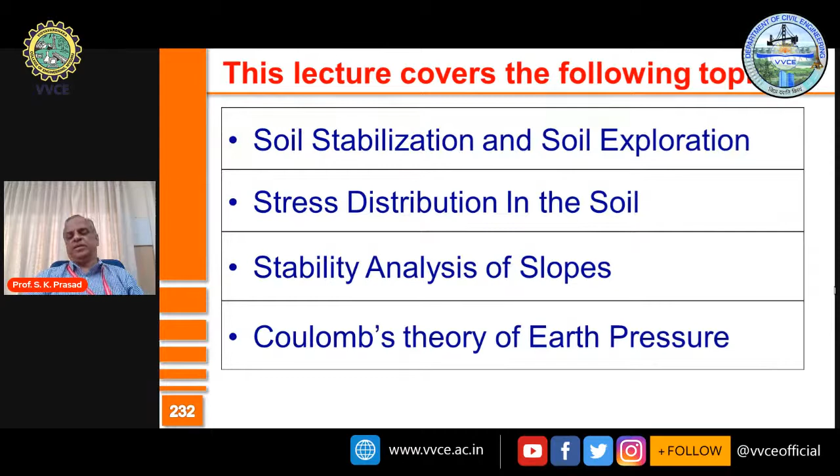Friends, you already know that geotechnical engineering is one of the popular branches of civil engineering in GATE. Also, from the point of view of overall development in civil engineering, I strongly believe good knowledge of geotechnical engineering can take you forward, because there are lots and lots of opportunities from the geotechnical application side.

So one very important topic in geotechnical engineering is subsurface investigation. We build our foundations below the ground, but we will not know what is there below the ground beforehand. We'll either have to go deep and see, or use some indirect methods to explore. Only when we know what is happening below, only when we know whether the foundation soil is capable of taking the load coming from the superstructure, will we be in a position to build our structures safely and durably.

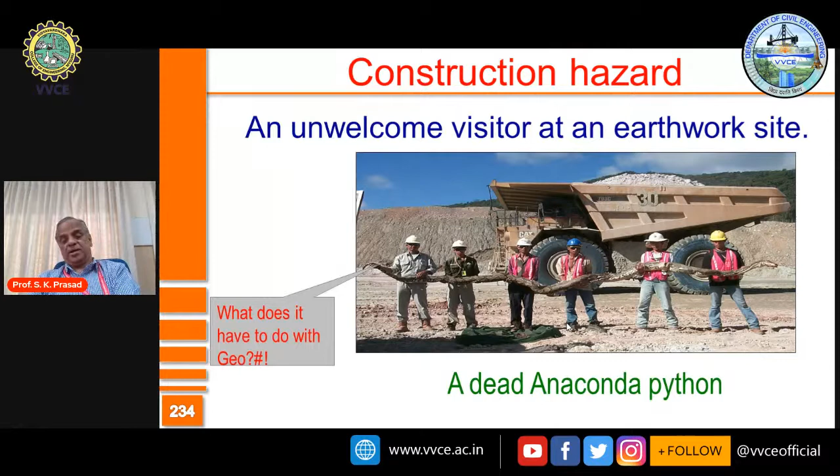Many times we use indirect methods to predict the strength and durability of soil, which is a big challenge. So we need to explore how good the soil is at different depths, which is the most suitable depth at which you have to found your foundation, and how the foundation and hence the entire structure is going to perform because of the load transferred from it to the ground below. This is a very important topic of foundation engineering.

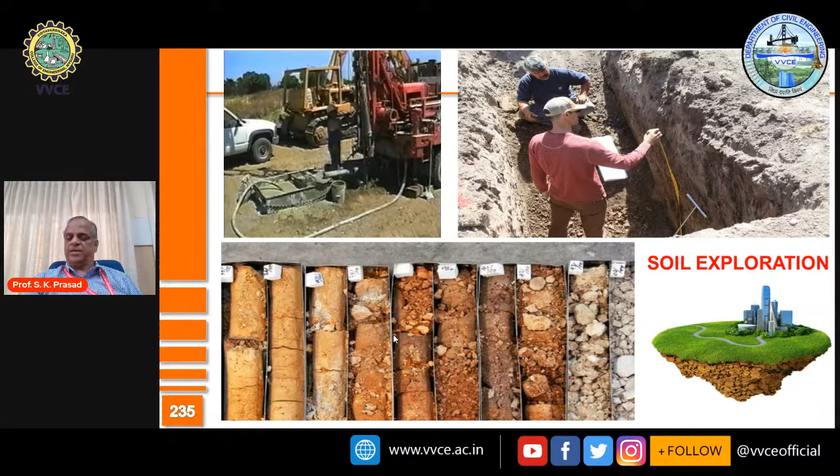Whenever you want to build any structure on the ground, it is the soil below which takes the load. So whenever boreholes are made, bore samples are taken something like this. Every sample can be different from the other. You need to identify the different properties of these samples, and hence predict how the behavior of the ground will be.

So you normally will have a soil report, which is a very valuable document for the design and construction of any structure. In a soil report, you may use data like SPT N value or shear wave velocity, or maybe sometimes plate load test can also be conducted.

You also collect data like water content, density, and at what depth the groundwater table exists. You try to find out the kind of soil available, and you try to evaluate strength parameters and settlement properties of the soil.

Use them to interpret. Basically, you have to identify the soil. I'm sure my colleague Professor Chetan would have talked about soil classification.

The biggest challenge is to decide the depth of foundation. Only when you decide the depth of foundation, you may be able to tell what kind of foundation to provide. These two are complementary to each other. So to determine the type of foundation, you require depth of foundation, and to also determine depth of foundation, you need to have a fair idea about the kind of foundation coming in.

So then you may also have to say whether the soil can be used as it is or does it require some treatment. You need to evaluate properties like safe bearing capacity of soil, and hence you can suggest the most suitable foundation you can go in for.

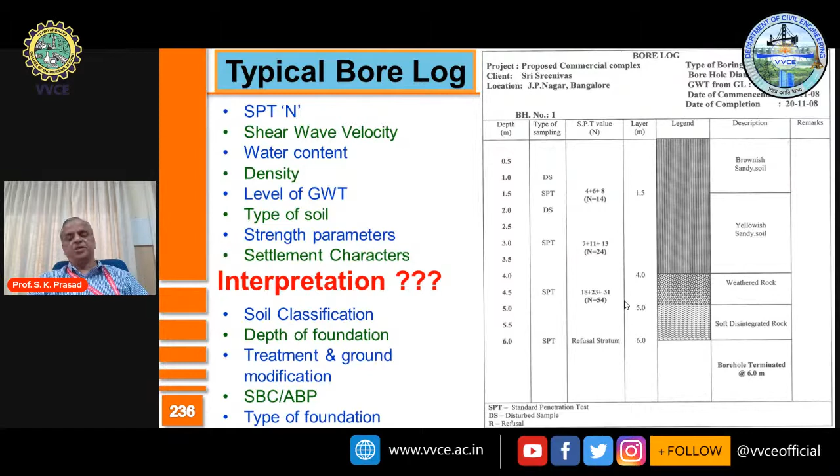I always advocate that soil investigation is very essential before any project you undertake. Earlier days, it was not considered mandatory. Many times people just assumed some data and managed to build the structures. Today, we don't have every place which has got good type of soil, and also we are having more complicated structures. Earlier days, if any soil was found to be unsuitable, there was scope to discard that site itself. We can't do that now.

So it is always essential that we do site investigation, get the data about the soil, and then do the construction. Just like you go to a doctor and ask for treatment - earlier days, the doctor used to identify or approximate certain things and just advocate some medication. Today we have very complicated diseases. Doctors cannot take risk. They would say go for tests, pathological tests, screening tests, and based on the test result, the doctor would confirm the kind of problem one has and provide the medication.

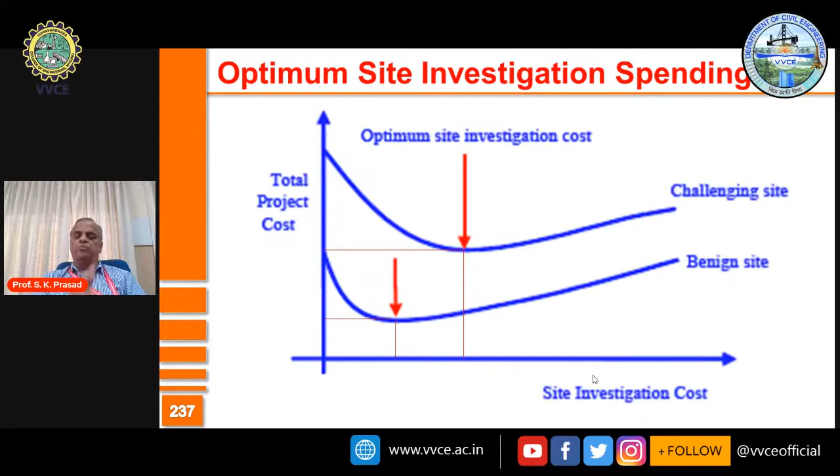So the message is site investigation is essential, whether it is an easy site or a challenging site. Cost for site investigation will automatically be more in a site where you have a lot of challenges. Otherwise, in an easy site, perhaps you may spend some nominal amount, but definitely note that the total cost of construction is going to reduce if you decide on doing the site investigation in the rightful way.

You might always have a question as to at what depth the investigation is essential. Let us say you have a foundation at a depth D, say 1 meter. You are going to found your foundation at 1 meter depth below the ground. The soil at this depth is going to take that load. So is it enough if you take the soil properties at this depth? That is one of the questions anybody would normally have.

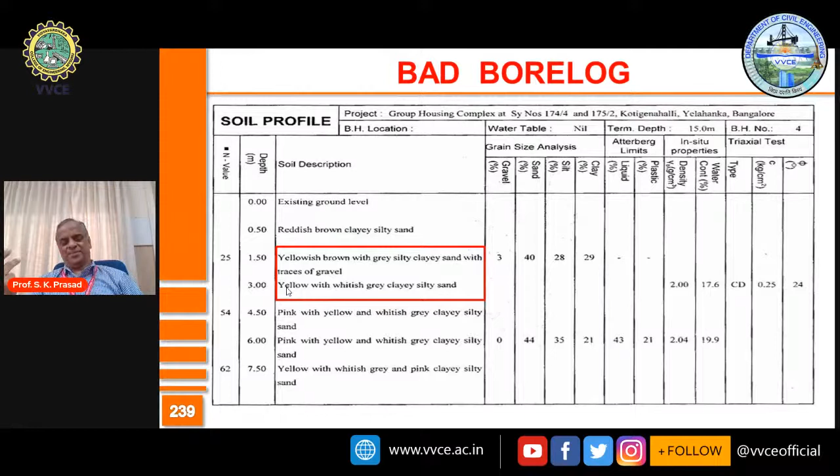But all of us know that according to IS classification, we define the soil by only 2 letters. So it could be gravel, it could be sand. But the way it is explained, it looks absurd.

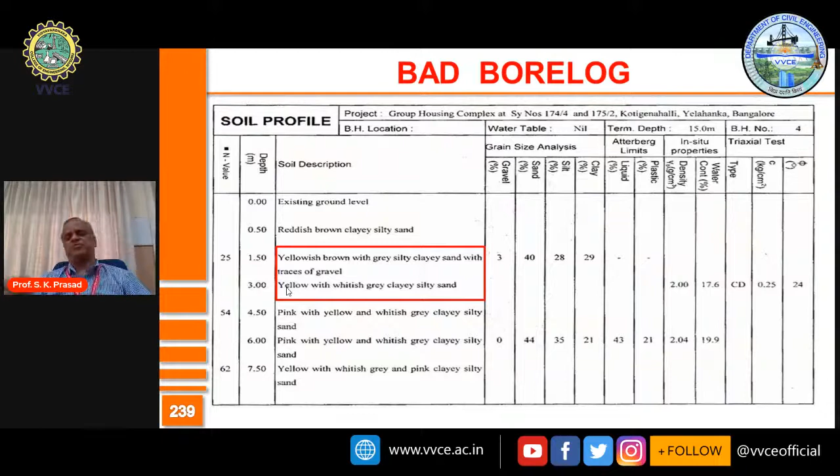So that just gave you one hint about what is a bad soil report. Whenever a soil report is given, it should be such that a person can really visualize what kind of soil exists there. And when he goes there, he should be able to identify that whatever is given in the report matches with whatever is seen in the field. And that is missing in many of the situations.

So one of the important things from soil investigation is that you either have a borehole or you make an open excavation, and then you take out the soil sample and take them to the laboratory and do the test. So one of the biggest challenges is to collect the soil sample in a possibly relatively undisturbed manner, because you need to predict whatever are the properties of the soil in the field.

And if it is already disturbed, if its structure is going to be disturbed, it's going to make things very different, because what you want is actually what is there in the field. So to collect undisturbed sample is a big challenge. For that, we use sampling tubes, and there are certain requisite properties of soil sampling tubes which are essential.

And to understand that, we have a few terminologies which I want all of you to be familiar with. It could be area ratio, it could be inside clearance, it could be outside clearance.

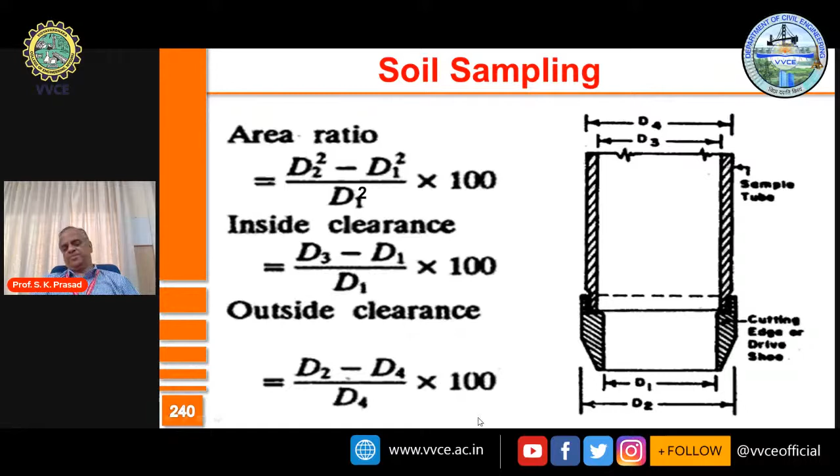And if at all you want the sampler to be the best sampler, there are certain provisions, certain guidelines for this. It is mentioned that the area ratio should be as small as possible. Under normal circumstance, it should be much less than 25%. But in soft, sensitive soils, and if the work is done for an important work, it should be less than 10%. Inside clearance should be 1 to 3%.

Outside clearance should not be more than inside clearance. Walls of the sampler should be smooth and they should be oiled before use so that friction can be reduced, friction can be minimized. Non-return valve permits easy and quick escape of water and air while driving the sampler.

So D1, D2, D3 and D4 are already explained. So these are some of the minimum requirements. Only when these requirements are satisfied, you say that the sampler is good. You say that the sampler causes minimum disturbance to the structure of soil.

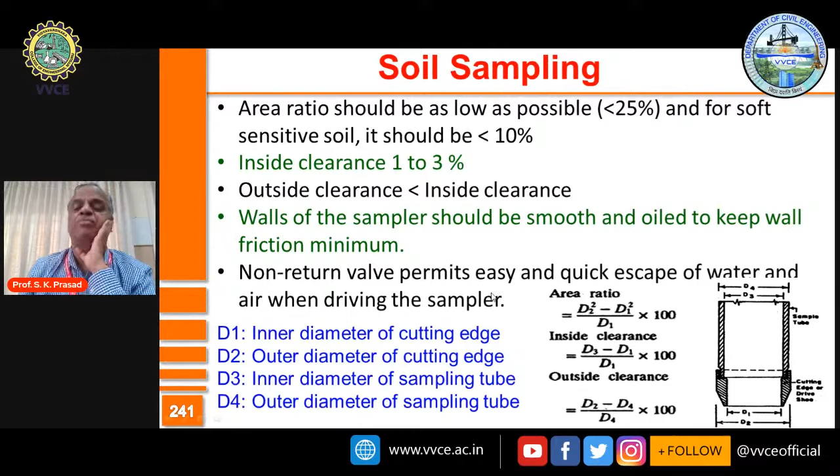So you might have questions. I would like you people to be familiar with the equations. Maybe if you learn them by heart also it is good.

The degree of disturbance of sample collected by the sampler is expressed in terms of area ratio. If the outer diameter and inner diameter of the sampler are DO and DI respectively, area ratio is given by, we already dealt with, DO squared minus DI squared divided by DI squared into 100.

So I have taken a typical case when the outer is 44 millimeter, the inner is 38 millimeter, and area ratio happens to be 34.1%, which is much higher than what is acceptable.

So if you have something like this, it is not a good sampler. Maybe if you reduce DO to 42 millimeter or even 40 millimeter, then the area ratio is likely to come to less than 25%, therefore acceptable.

Therefore, you should be very clear, and hence, the walls of the sampler should be as thin as possible, as smooth as possible. Then only you may be able to achieve better results. Otherwise, they may cause disturbance to the sample which is collected, and hence, samples may not represent the actual site condition.

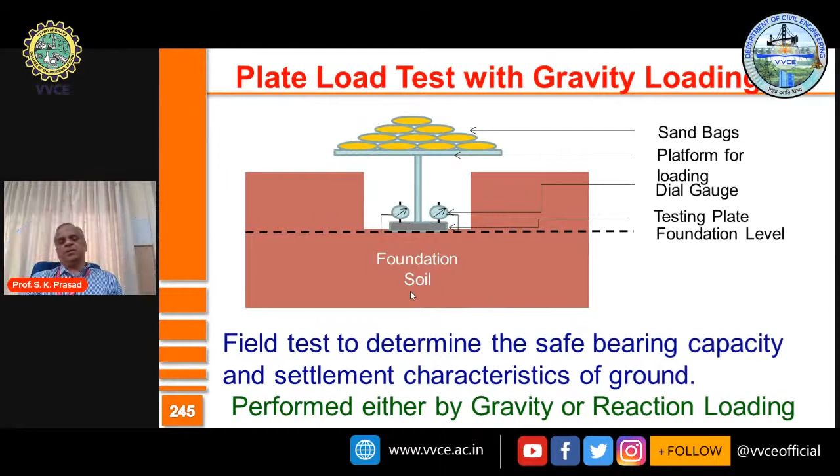Then plot a graph between applied load and the deformation or settlement. The kind of loading many times preferred is reaction loading. So in this case, instead of putting the load through sandbags, we are going to use a truss or a reaction beam, and of course a jack - just like you use a jack to lift up the wheels of a car when it is punctured.

So in the same way you use a jack here, keep on loading through reaction loading and see the deformations measured from dial gauges. This is preferred over the gravity loading case because there you require a huge number of cement bags or sandbags - could be 100, 150, 200, it all depends on how much load it takes. And then you require a solid platform to house all these sandbags.

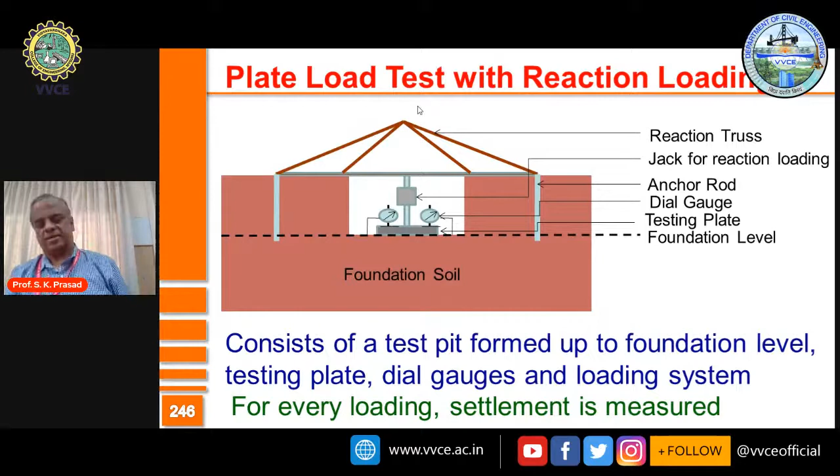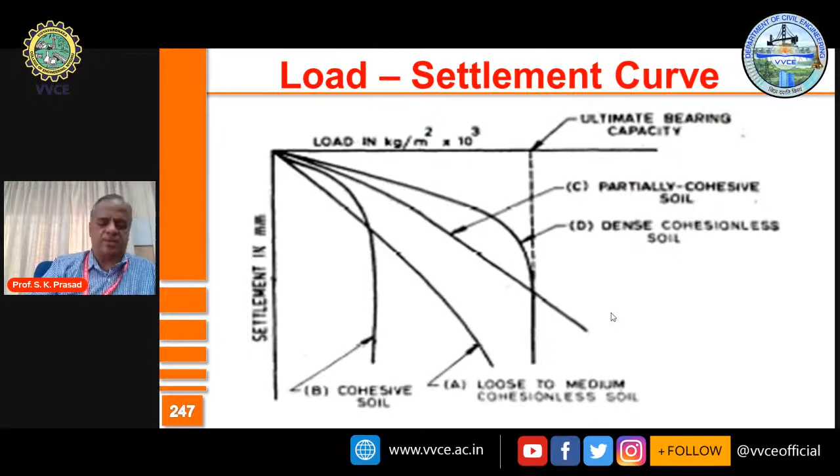So you will be in a position to determine allowable bearing pressure in a better way here, because you get the shear failure capacity at the time of shear failure, and you also get an idea about the settlement characteristics. So both these factors are to be considered from the point of view of determining the allowable bearing pressure.

Two, being a field test, there is no requirement of extracting soil sample. I told you, you need to extract soil sample, bring it to the laboratory and do the test. In this case, not required, because it is a test conducted in the field. Therefore, no need to collect sample - you conduct the test directly.

Test is similar to the field condition, most importantly. So in the field, how you load the foundation, exactly in the same way, you actually load the plate, and hence it simulates field condition to the best extent.

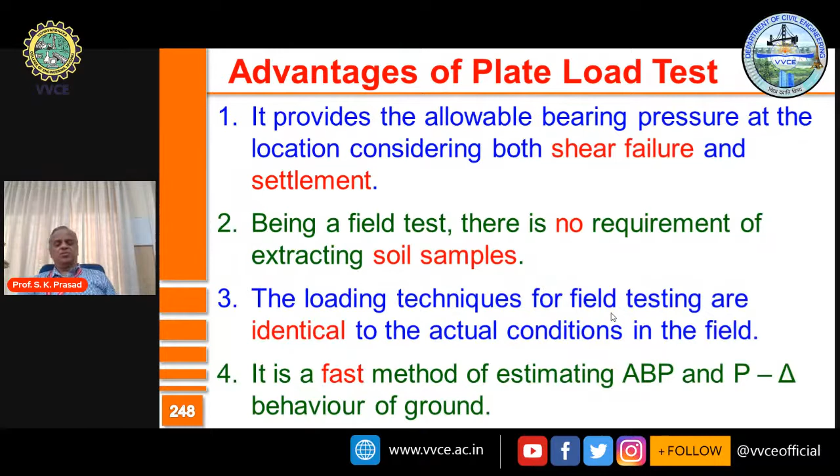It's a fast method. You do the test and quickly get the result, so it's a fast method to estimate the SBC or allowable bearing pressure of soil.

Some of the disadvantages: test results reflect the behavior of soil below the plate, not the actual footing. This is what you need to very seriously know. Let me try to show here.

Let us say you do the test on a plate of size 30 centimeters, 0.3 meter. The area of influence will be 2 times 0.3, about 0.6 meters. So the area of influence is approximately 0.6 meters. Any soil below, you don't know what type of soil it is - it may be strong or it may be on the other side.

Let us say you have an actual footing of size 2 meters. Then its influence is for a depth equal to 2 times 2 meters, about 4 meters. So the test is conducted only at shallow depth - the area considered is only about 0.6 meters. Below that, even if the soil is poor, you will not be able to understand or assess it. So that's one of the major disadvantages.

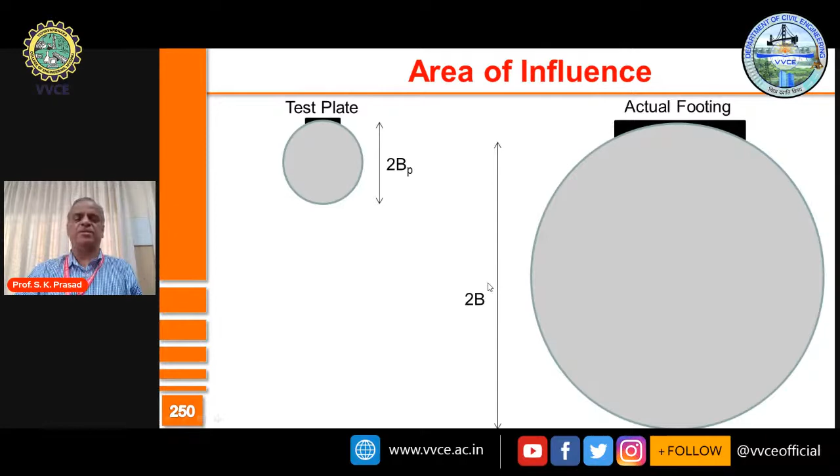It is essentially a short duration test. You do the test for a week or so, but our buildings have to last long, for centuries maybe. So long-term effects are not determined from this test. One of the long-term effects is settlement. Settlement can happen over a month, years, centuries - we don't know, and we will not be able to identify anything about the actual settlement, consolidation settlement.

Size effect is very much pronounced in granular soils which are cohesionless. So correction for size has to be given because the size of the plate is very different from the actual size of the foundation. It's a cumbersome procedure to carry equipment, apply huge load, and carry out testing for several days

in tough field environment, field conditions. So the test procedure is quite laborious. You require heavy trucks to carry the equipment. You need to do the excavation to the desired depth, and carry out several tests under tough conditions, which is fairly laborious. You require a lot of labor force and sophisticated equipment to transport in heavy trucks and so on.

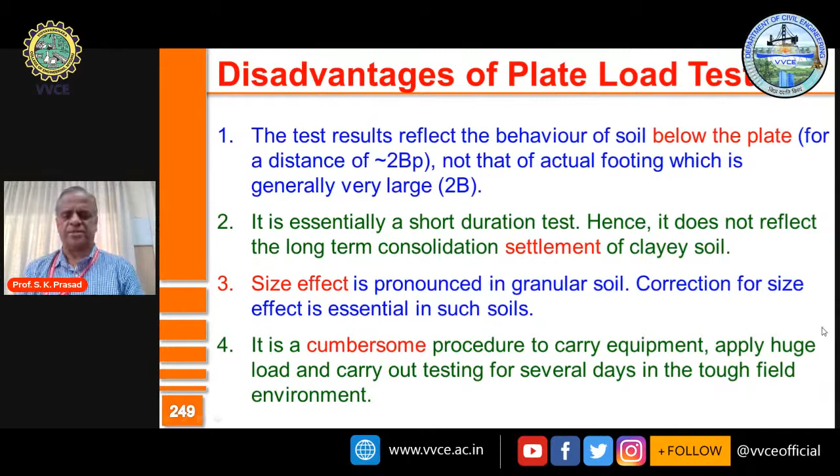The equation for clayey soil, cohesive soil, is very simple: SP by SF, settlement in plate by settlement in footing, is equal to BP by BF, width of the plate by width of the footing. You will know the width of the plate, you will have decided what should be the width of the footing, and you'll know from the plate load test what is the settlement arrived at under a given plate size. Therefore SF can be determined, so you can determine the settlement based on these characteristics.

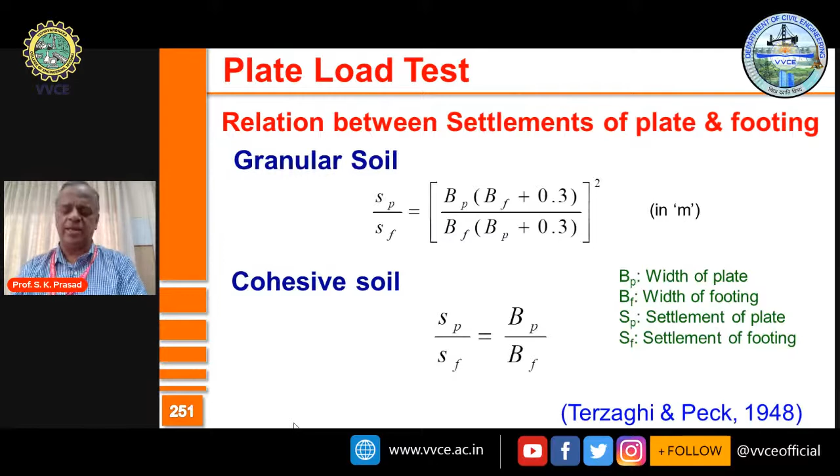In the same way, you can find out settlement in cohesionless soils also, granular soils also - the equation is slightly more involved, so you use a constant 0.3 when BP and BF are in meters. This is how the plate load test results are used to determine settlement. Therefore you have to identify what kind of soil it is - granular or clay soil - and then do your calculation using the appropriate formula.

Let us take a few questions here. The plate load test was conducted on clayey strata using a plate of size 0.3 meter by 0.3 meter, and ultimate load per unit area was found to be 180 kilopascal, 180 kilonewton per meter square. Ultimate bearing capacity of a 2-meter wide square footing would be

dash. Please note that you are using a plate for the test, size 0.3 meter by 0.3 meter, and the actual footing will be squarish again, 2 meter by 2 meter. From the plate load test, it was found that the ultimate bearing capacity is 180 kilopascal. What is the ultimate bearing capacity for the 2 meter by 2 meter footing?

I want you to read the problem, read the question carefully. It is mentioned that the type of strata available, the type of ground available, is clay soil. If it is clay soil, it has cohesion, and possibly the friction angle will be less or even can be discarded. So if you take the bearing capacity equation for square footing, which we dealt with in the initial days,

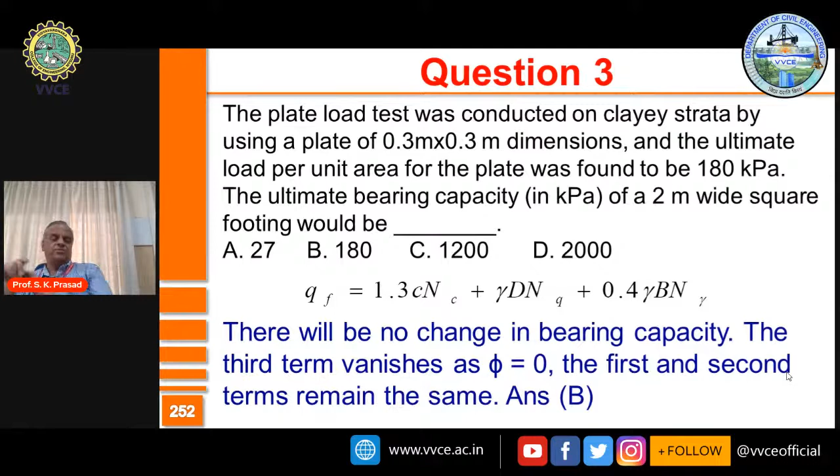Whatever is the NQ term, it will remain because the test is conducted at the same depth at which the foundation is put. Once the n-gamma term is gone, whatever is the width of foundation, bearing capacity is not affected. Only for the n-gamma term does bearing capacity increase with increase in width of the foundation. Therefore, since it is clay soil, phi is 0, there is no change in bearing capacity possible, and hence the answer is B, that is 180 kilonewton per meter squared or kilopascal.

Take this problem. A plate load test was conducted on clayey strata using a plate of size 0.3 meter by 0.3 meter, and the plate experienced a settlement of 2 millimeters. The settlement of a 2 meter wide square footing would be how much? First of all, find out the type of soil.

It is clay soil, therefore you use this equation. If it is granular soil, you have to use a slightly different equation. The plate size is 0.3 meter, the settlement is 2 millimeter, but the actual footing size is 2 meters. Therefore, you find that the settlement is 13.33 millimeters, or SF is equal to 13.33 millimeters.

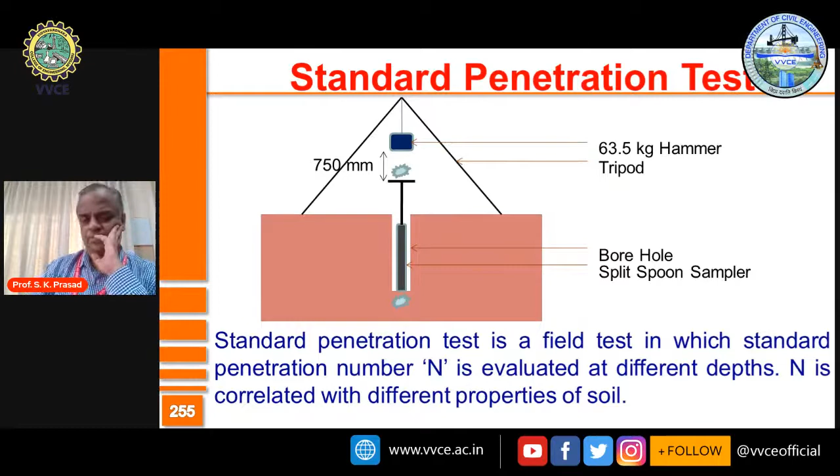So the test is: clean the borehole, approximately 100 mm in diameter, and then a thick walled split spoon sampler is driven into the hole using a standard hammer of 63.5 kgs, dropped from a height of 750 millimeters. The number of blows required for penetration of the sampler into the ground for three lengths, each of 150 mm, is identified and recorded. The standard penetration number is the number of blows for penetration of 300 mm beyond the seating drive of the first one, that is considered as the standard penetration number.

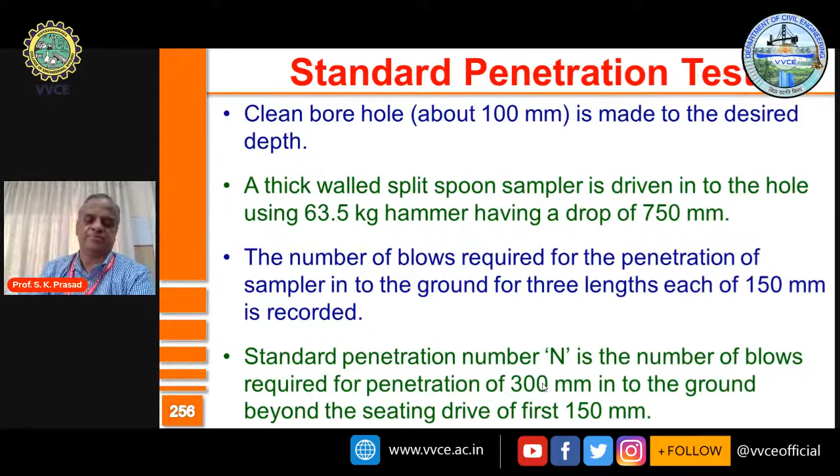If the number is more, it indicates that resistance is more, soil is stiffer. If the number is less, automatically the soil is on the softer side. These are some of the relations for various properties of soil as a function of SPT N value. N is a mere number, so you use N to determine density of soil and other characteristics, including allowable bearing pressure of soil. Here is one relationship, given by Teng way back in the 1970s or so, in the form of an equation like this, which can be used to determine the allowable bearing pressure.

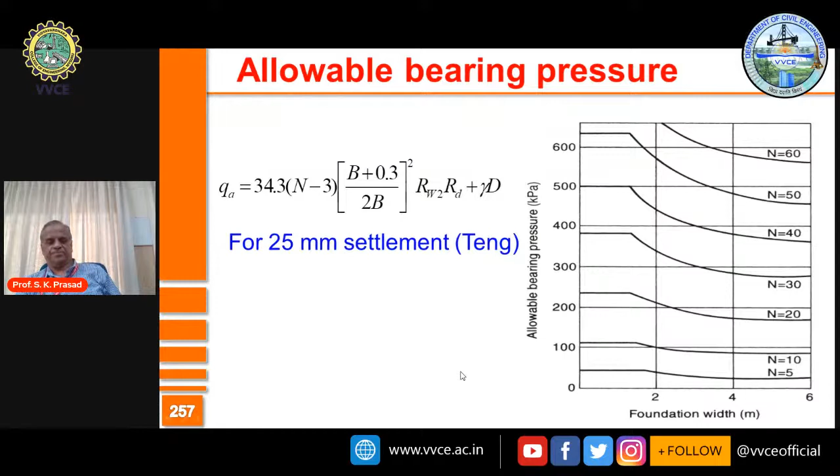You can also bring out the relationship between SPTN value and relative density, as given by Gibbs and Holtz or Terzaghi and Peck. When SPTN value is very low, the soil is very loose. When SPTN value is more than 50, there is good scope for the soil to be stiffer.

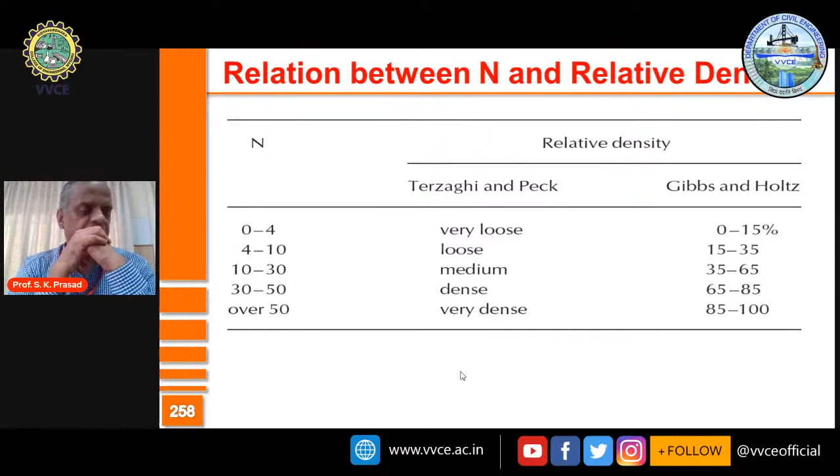You apply two major corrections to SPTN value. One is correction for overburden pressure, and the other is correction for dilatancy. You also apply correction for energy, but that is not covered in this particular topic. You can always refer to any other standard method where correction for energy is also given.

So now, correction for overburden pressure. Please note that SPT has to be conducted at the ground surface and at different depths below the ground till you reach the bottom where you may put your foundation or whatever it is.

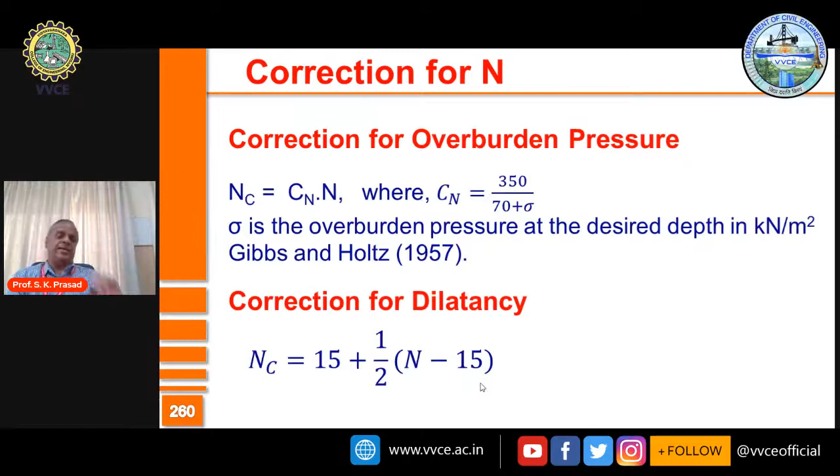The other test correction is for dilatancy. This correction is applied because the SPT test is done by dropping a hammer. That dropping hammer causes impact, and sometimes this impact may be good enough to cause liquefaction in the ground. Usually, loose ground having low density is likely to be affected by liquefaction, and hence the measured strength will be lower than the actual value. On the other hand, in stiff materials, measured strength can be higher than the actual value. So you need to consider this and apply your correction.

So very quickly, we will try to see some of the advantages and disadvantages of SPT, standard penetration test.

We like SPT because it is a simple test. It can be conducted by varieties of people. You don't require serious equipment. You require a hammer, and you require it to be dropped from a height. More or less, all other things are not so mandatory; you need a tripod to hold the hammer and so on. The test involves finding N, and this N is a function of many properties of soil: could be shear strength, density, allowable bearing pressure, relative density, dynamic soil properties, many, many things. So only one N is sufficient to determine several properties of soil.

That's the advantage. Samples collected in split spoon sampler can be used for laboratory testing. You can use the samples to directly do the testing in the laboratory and compare with SPT N value. It's a very quick test.

So what you have to do is have a borehole and conduct the test. It might take just a couple of hours. N, the SPT N value, can be determined along the depth in a borehole. At regular intervals you can determine it, and you'll be in a position to choose the right kind of borehole data, choose the exact.

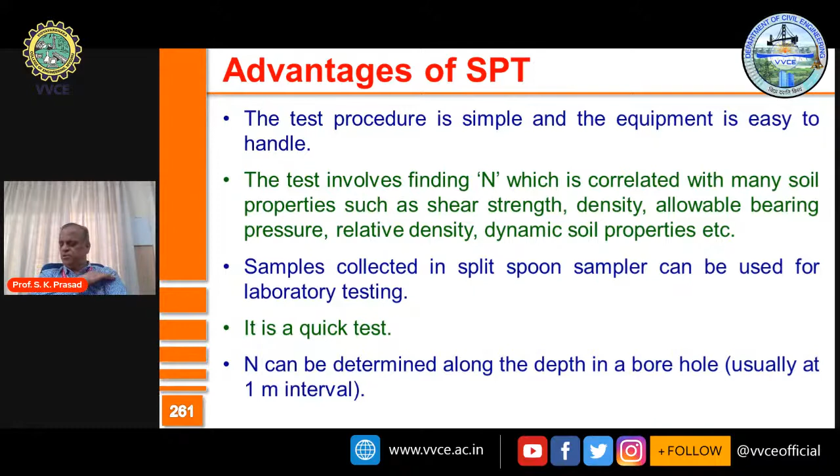So you can conduct N at different intervals of distance, maybe 1 meter or so. You'll be in a position to find actual soil properties at every 1 meter depth, or sometimes even 0.5 to 0.75 meter depth. Therefore, you'll be able to identify the exact depth at which the foundation can be founded.

Some disadvantages: the test is dynamic because you apply the load dynamically, but you use it for static properties of soil. What guarantee is there that dynamic and static properties correlate? You don't get continuous results, usually at 1 meter intervals. In very accurate cases, especially in places like Japan, 0.75 meter, but it's not continuous recording.

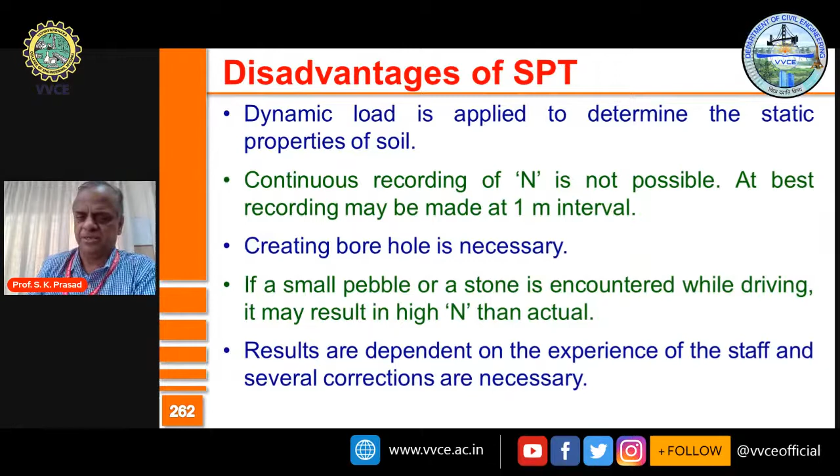Creating a borehole is a must, you need to create a borehole. And while driving the hammer, if a small pebble is encountered, the results are automatically boosted up, appearing as if it's very stiff soil. Results also depend on the experience of the staff members and several other details. So these are some of the main disadvantages of SPT.

Well friends, we'll try to see a few questions. If in saturated fine silty sand, measured value of N is 3, will the corrected N be more or less?

Since we say saturated fine silty sand with no mention of overburden pressure, the kind of correction is for dilatancy, and this is the formula you have to use. If the measured value is 3, you apply it here, the actual value will be much, much higher. Put N equal to 3, and you'll notice NC will be 9. So the value of corrected N will be more than 3.

On the other hand, take this case: you have a stiffer soil, measured N is 33. What about the actual N? Actual N will be less than the measured N, so the answer should be less than 33. Measured N is actually more than the actual value; the actual value should be 24.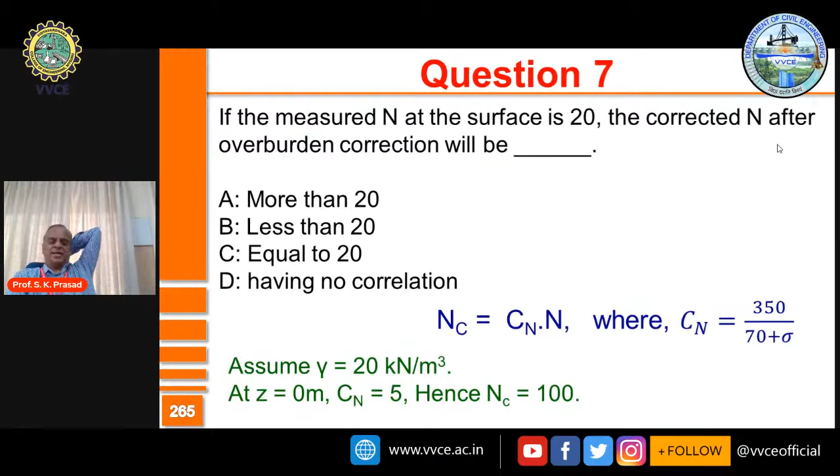On the other hand, if SPT is measured at a depth of 50 meters and the measured value is 20, then after applying the overburden correction, the corrected N value will be less than that. So the answer should be B. Why?

Z is equal to 50 meter depth, and you apply the density of the soil. Therefore, Cn, which is 350 divided by 70 plus sigma, will be much less than 1, and hence the corrected N is lower than the actual N. In this case, it is found to be 6 point something. You round it off to the lower number, a little more on the conservative side. Therefore corrected N is 6, much less than 20. So the right answer here is B.

The other important test is CPT, cone penetration test, also called Dutch cone penetration test. It's quite popular in Europe. The IS code for this is 4968 part 3. It gives a continuous record of the penetration resistance. The main body consists of a cone of size 35.7 millimeter diameter and 60-degree vertex angle.

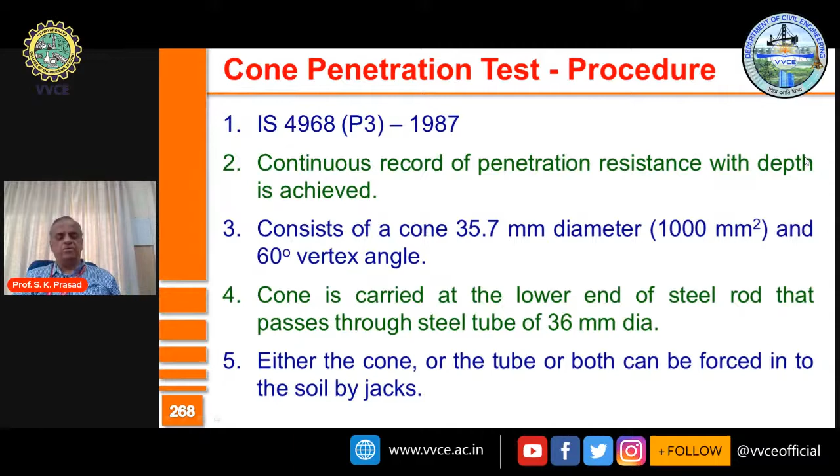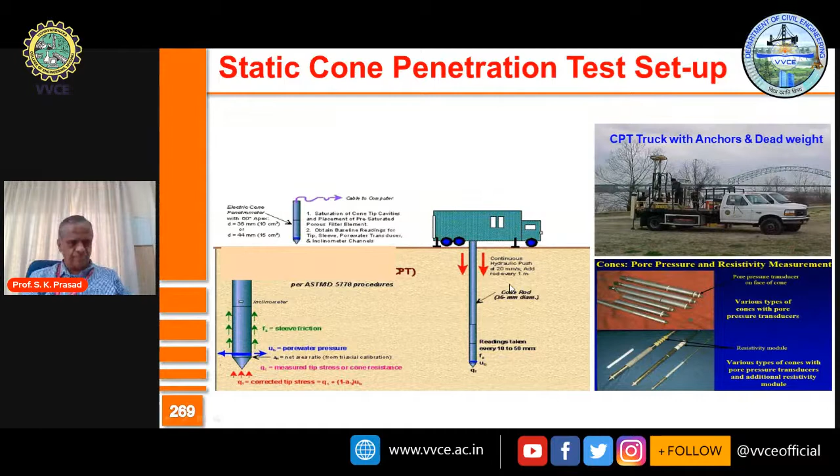Cone is carried at the lower end of a steel rod that passes through a steel tube of 36 millimeter diameter. Either the cone or the tube, or both of them, can be forced into the soil using jacks. This is how the test equipment would be, and the CPT is conducted at this depth, allowing you to determine the resistance for penetration of the static cone.

As I said, it consists of a cone, a rod with a cone which can be pushed separately, a sleeve or steel tube which can also be pushed separately, or both of them can be pushed together. In cone penetration test, either the steel tube or cone or both can be forced into the ground at a very slow rate.

The rate at which it is penetrated into the ground should not be more than approximately 20 millimeter per second. Why should it not be more? If it is more, automatically there will be some disturbance due to the high speed with which it is penetrated, and hence you may not get the actual results.

Cone penetration resistance is the sum of the resistance for pushing the cone by 8 centimeters, then pushing the steel tube also by 8 centimeters, and finally pushing the cone and tube simultaneously for the next 20 centimeters. So it is expressed in kilonewton per meter squared, as QC equals QC1 plus QC2 plus QC3.

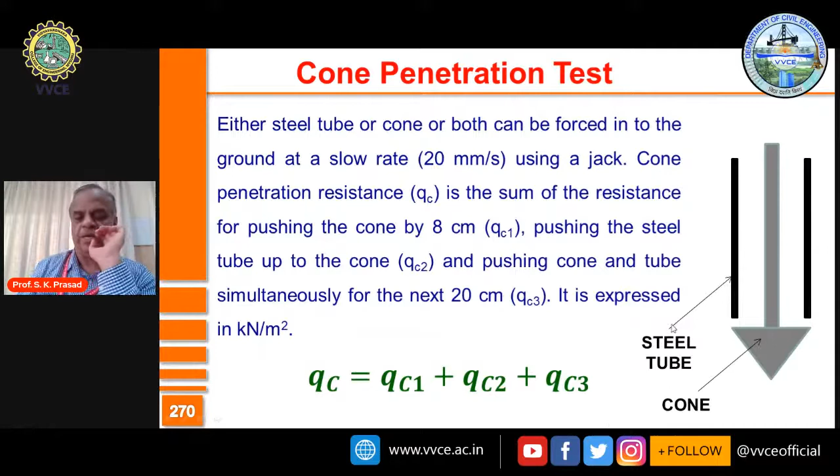It correlates with SPT very well. Therefore, most properties of soil can be determined. This test can separate skin friction from tip resistance.

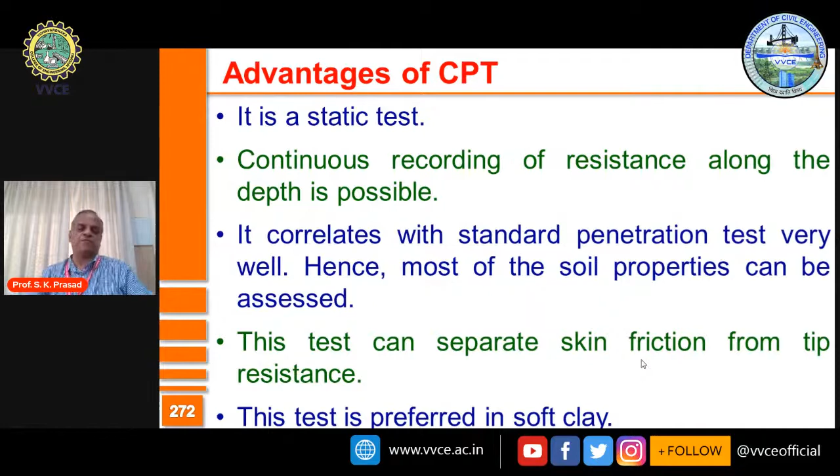Please note, this is one of the biggest advantages of CPT, because when you think of providing pile foundation, you need to know how much is the capacity under skin friction and how much is the capacity under tip resistance. Based on that, you can plan your piles. Therefore, this test can separate out skin friction from tip resistance, and it is particularly preferred in soft clay.

Disadvantages: it is more tedious to do this test than SPT. Results can be affected by the speed of penetration. The test requires costly equipment and more skilled labor.

One more question: Group 1 enlists in-situ field tests carried out on soil, and Group 2 provides a list of parameters for subsoil strength characterization. Match these two. In Group 1, P Q R S, you have pressure meter, SCPT, SPT, and vane shear test. In Group 2, you have Menard's modulus, number of blows, skin resistance, and undrained cohesion.

So naturally, pressure meter test is Menard's modulus, SCPT is the skin resistance, SPT is number of blows, and vane shear test is undrained cohesion. Therefore, the answer is: P1, Q3, R2, S4.

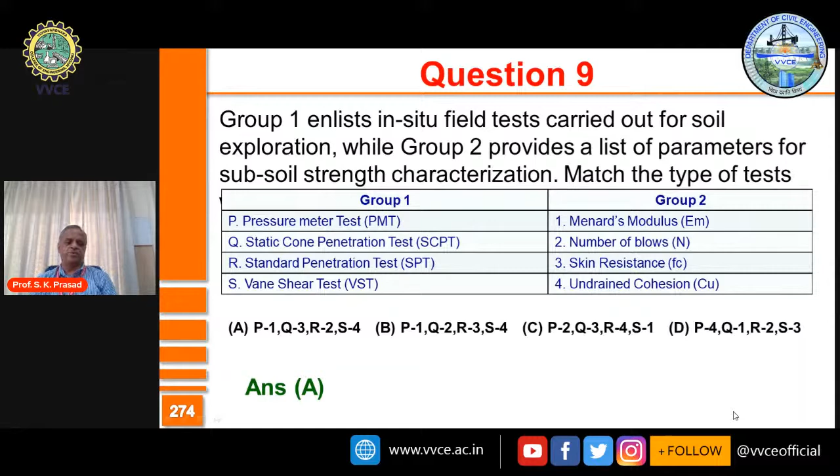Okay friends, let us move forward to learn about stress distribution in soil. All of you know that there are two types of stresses possible. One is geostatic stress, that is, stress at any level in the ground because of the overburden on top of it, so the deeper you go, the geostatic stress keeps increasing. The other one is stress due to some new structure which is built. So we need to consider both to find the total stress acting.

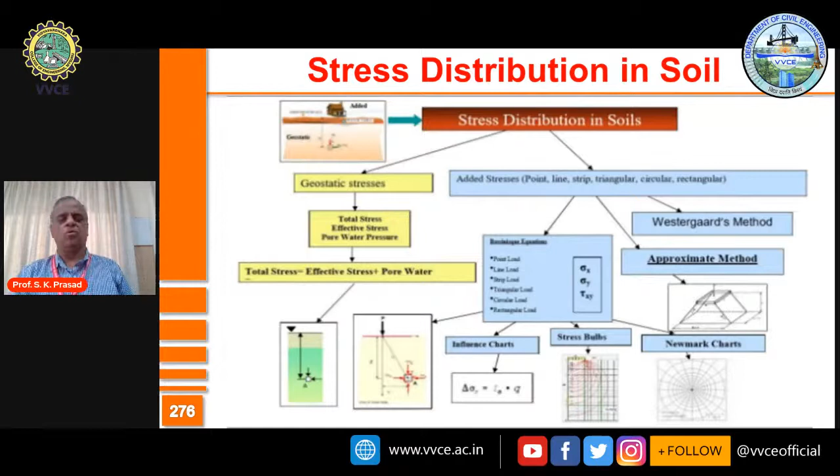So to determine stress distribution due to a new structure which is put, you do it separately, which you call determination of stress distribution of soil. To that, you can add geostatic stress and hence find out the total stress. To find the stress distribution in soil, you have a big challenge because several properties govern the stress distribution, so there are different methods by which you can formulate and determine it.

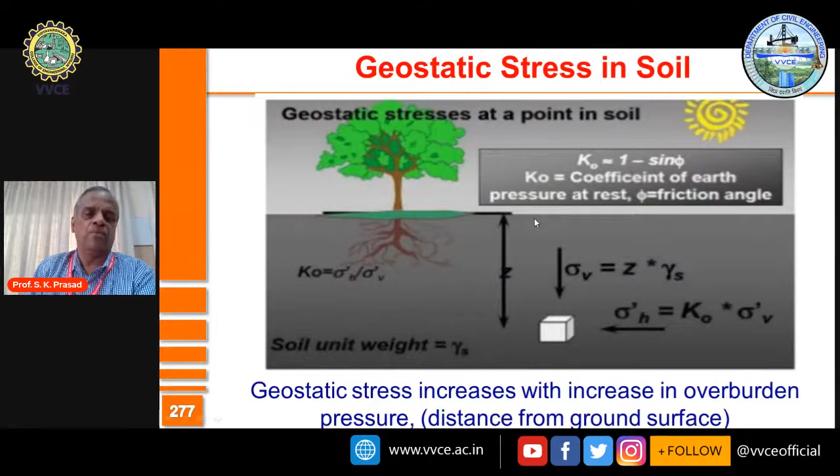We'll quickly see them. As I said, geostatic stress is the stress due to the overburden. If I take soil at a depth equal to Z, it is subjected to vertical stress equal to Z into gamma, the density. When Z increases, the pressure also increases. At Z equals 0, pressure will be close to 0. This is what geostatic stress is.

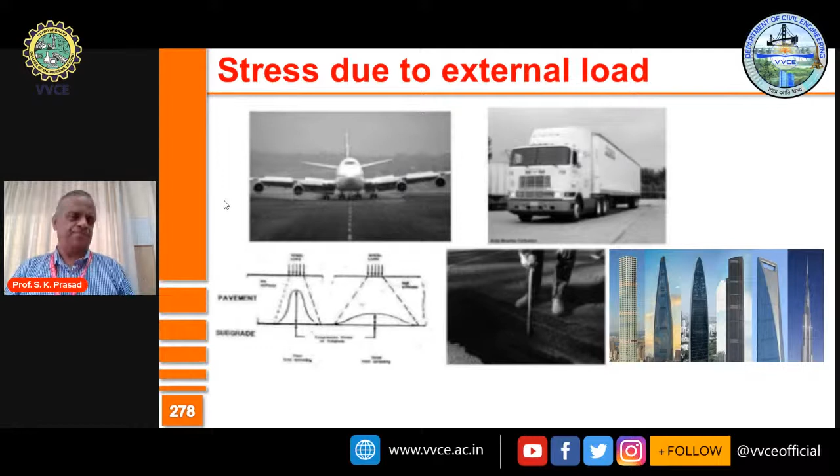Then you have stress due to external load, as I have shown here. Any load you put on soil is going to cause extra stress, and that's what we need to determine. It could be an aeroplane landing, at which time a heavy dynamic force acts on the ground, or it could be a truck, some penetration of a rod, or any building. All of them cause external load, and all of them cause stresses on the ground at different depths.

You have different researchers who have worked on it using the principles of theory of elasticity. Boussinesq made the bulk of the work.

Arrived at the formulas for different types of loading. I wish you would remember this equation by heart.

If you have a point load, theoretically of magnitude P, then the stress at any level is equal to sigma z, or delta sigma z, equal to Q by z squared into this formulation, where z is the depth under consideration and r is the radial distance. I want you people to somehow remember this equation. You may not remember the other equations, but this will be quite handy for you. So it's Q by z squared into 3 by 2 pi, into 1 over 1 plus r by z whole squared, to the power 5 by 2.

Boussinesq also gave equations for other types of loading, but for Boussinesq's equation, particularly for point load, some of the assumptions made are that soil is linear, elastic, homogeneous, isotropic, continuous, and semi-infinite. Most of the time we resort to this assumption.

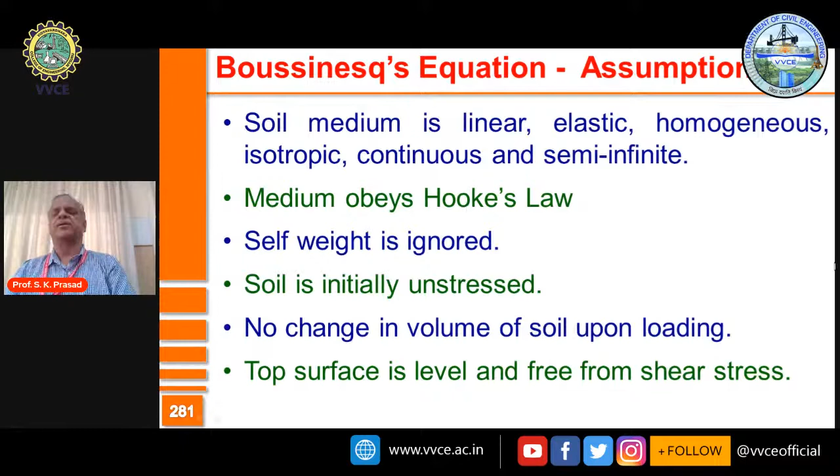The top surface is assumed to be level, assumed to be horizontal, and then it is assumed to contain no shear stress. So according to Boussinesq's theory for point load, you have bulbs like this which you call a pressure bulb.

Each of these bulbs represents the contour of some equal stress property. As you go for a bigger diameter, automatically the pressure decreases. The deeper and deeper you go, the pressure decreases. Radially, as you go further and further, the pressure decreases.

So if you try to plot the vertical stress in soil, just below the load it will be maximum. As you go away radially, it keeps reducing.

In the same way, if you go in a vertical direction, the deeper you go, the pressure is going to reduce. But there's an interesting point - the pressure is going to be maximum at a depth like this, where beta is given by 39 degrees 15 minutes.

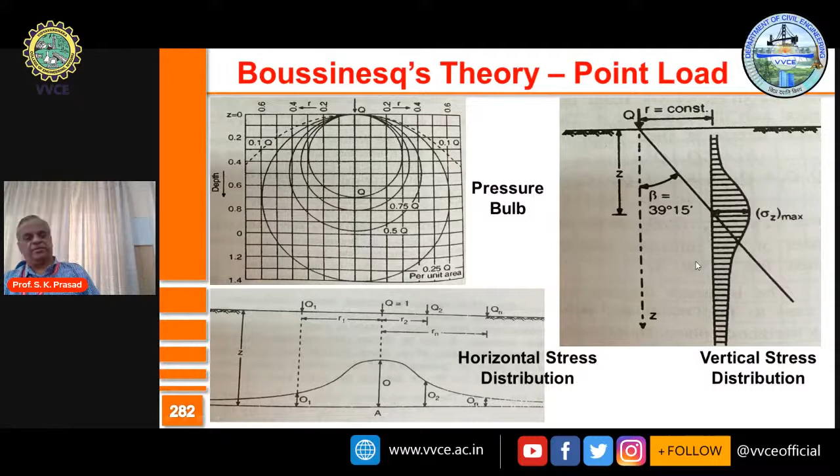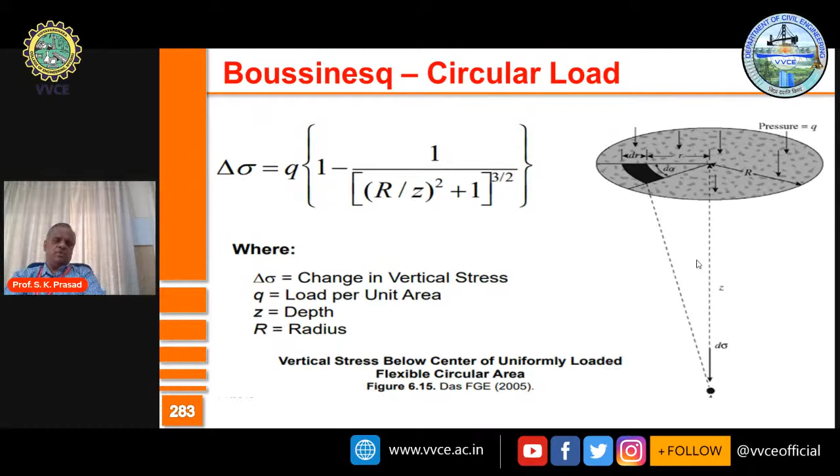This is the equation for circular load, which is in the form of a circle, uniformly distributed load - I'm not going to explain this. This is the equation for line load. This load extends perpendicular to the sheet here for a sufficient distance, and the equation is given by this.

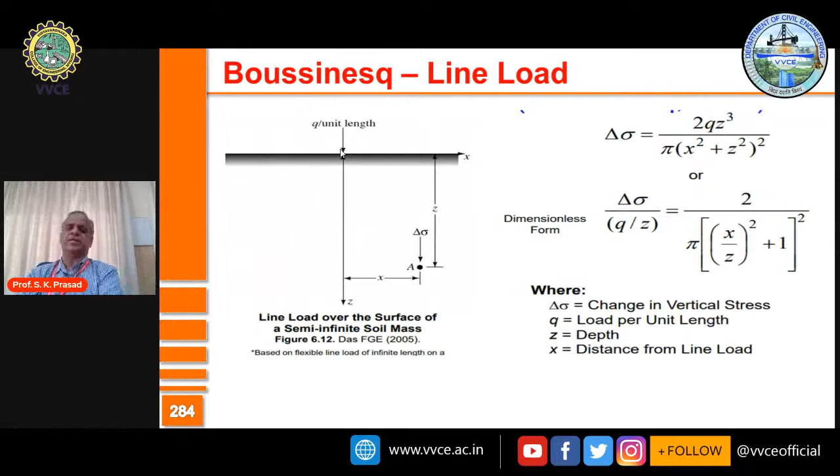Then you have a strip load to be considered, and then you have a rectangular load to be considered. Therefore, in all these cases, you find out the stress due to the external load.

Then you should have a good idea about contact pressure. Contact pressure is the pressure in soil at the point of contact with the footing. Please note that this contact pressure in soil depends on, or is a function of, how flexible the footing is. It's also a function of the type of soil and the depth of embedment.

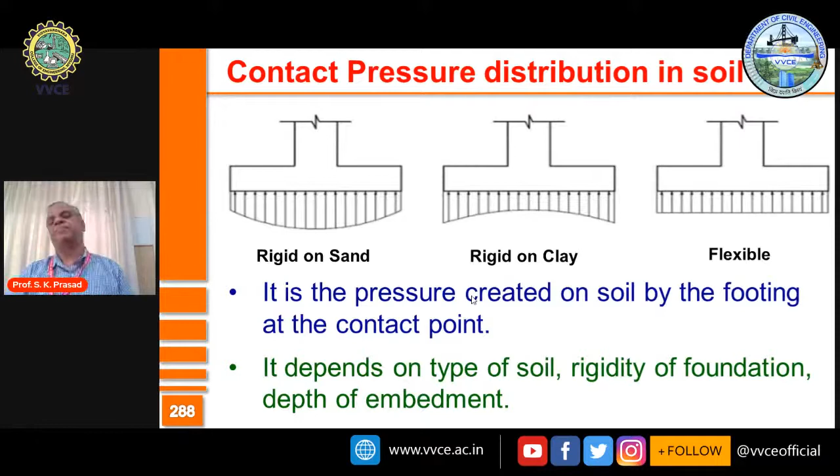So if you consider a rigid footing - please treat this as rigid footing - versus a flexible footing, then whether it is cohesive soil or cohesionless soil, the distribution is uniform. Only thing is, because the footing is flexible, it will experience more settlement at one place and less settlement at other places. In clay soil, it will experience more settlement at the center. On the other hand, in sandy soil, it is just the reverse.

In case of rigid footing, the footing is so rigid that there is no deformation of it. However, the stress distributions are different. In clay soils, the stresses at the edge are more. On the other hand, in granular soil, stresses are more at the center because of the confinement. This is how the effect of rigidity of the footing and effect of soil type are considered for contact pressure.

Also, depth of embedment will influence the contact pressure. The deeper you go, the value changes. For example, in granular soil, pressure at the edge is zero and maximum at the center. But at depth, that pressure will not be zero at the edge, and it will not be too high at the center either. It may be a moderate value. So that kind of property change is possible because of the depth of embedment. Contact pressure is dependent on the rigidity of the footing, type of the soil, and depth of overburden.

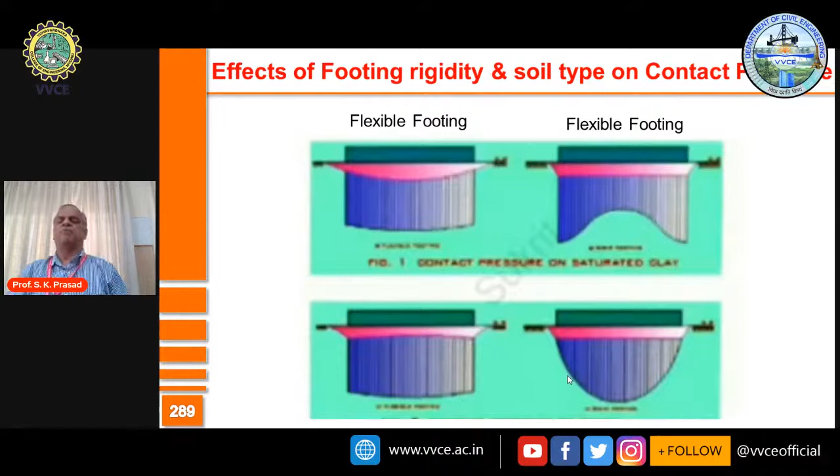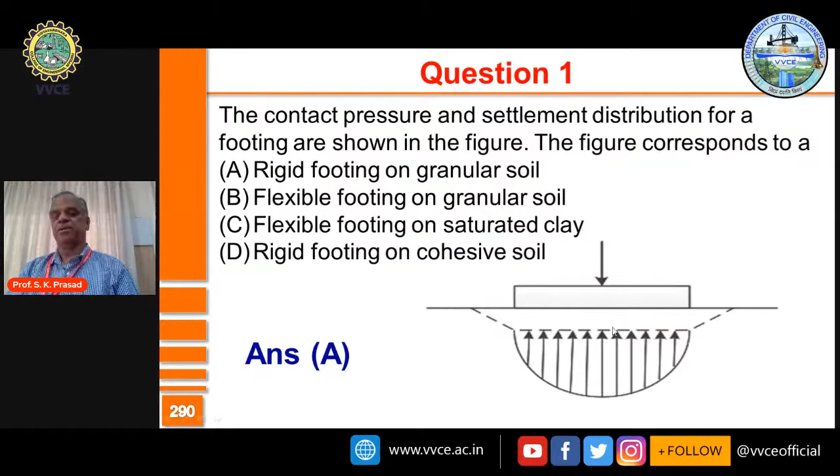Some problems: contact pressure and settlement distribution for a footing are shown here. The figure shows contact pressure is zero at the edge, maximum at the center. Therefore, it corresponds to granular soil, and since the pressure is not uniform, the footing is rigid. So, rigid footing on granular soil, therefore the answer is A.

A load of 500 kilonewtons is acting on the ground surface. Based on Boussinesq's theory, find the ratio of vertical stress at depths of 2 and 4 meters right below the load, where R is 0. Therefore, the entire bracketed term will be equal to 1, equal to 3 by 2 pi, so this is a constant. At depth Z equal to 2 meters, the intensity will be Q by 4. At depth Z equal to 4 meters, intensity will be Q by 16. Therefore, vertical stress at 2 meters to vertical stress at 4 meters ratio equals 4, and hence the answer is D.

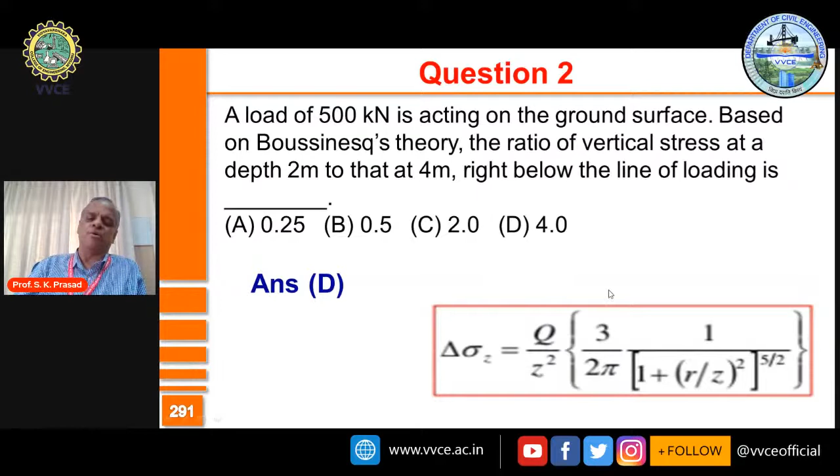Consider another situation, as in the question paper: a vertical stress at point P1 due to point load Q on the ground surface is sigma. According to Boussinesq's theory, the vertical stress at P2, which is at a distance R by 2 radially and Z by 2 vertically, this ratio is going to be the same, so no change, and hence the entire bracketed term is constant. In the first case, it is Q by Z squared. In the second case at P2, it is Q by (Z by 2) whole square. So the variation is 4 times sigma. Therefore, the answer is D.

So friends, you may have situations like this where you need to find the stress in soil because of the new structure which is built. Add it to the geostatic stress and find out at different depths what stress level the soil is subjected to. If it is more than the strength, you have to be concerned. Otherwise, you can be safe.

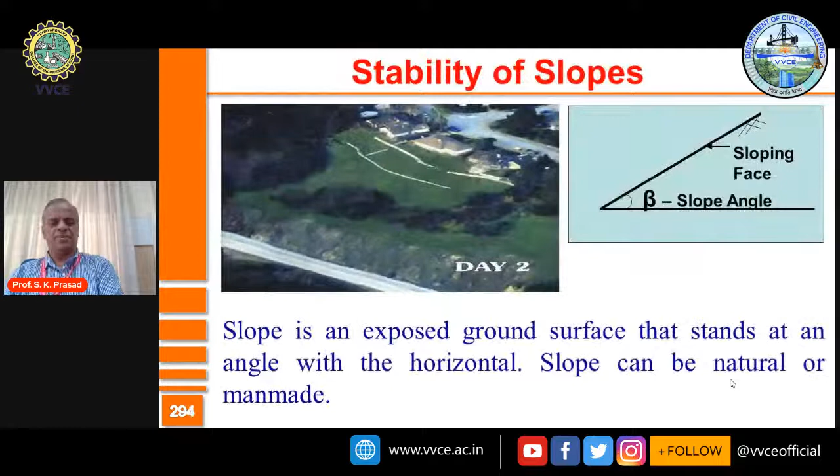Let's quickly go over to the next topic, stability of slopes. That is a big challenge. You must have heard in the news, especially in North India, in Uttarakhand, where people go for pilgrimage to Badrinath and Kedarnath, about landslides hampering daily routine life. Slopes are grounds which are inclined and they are quite vulnerable, likely to experience slides. We should be able to identify whether a given slope is stable or not, and there are many reasons that cause a slope to become unstable.

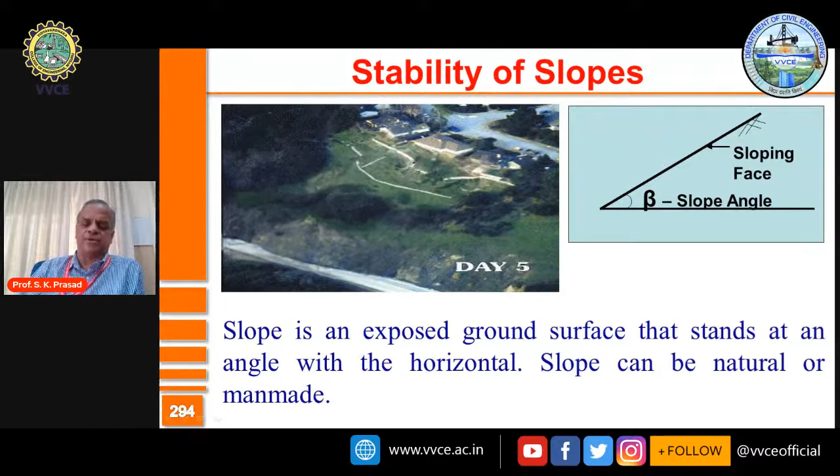A slope is an exposed ground surface that stands at an angle different from horizontal, inclined at some angle to horizontal. Slopes can be natural or man-made.

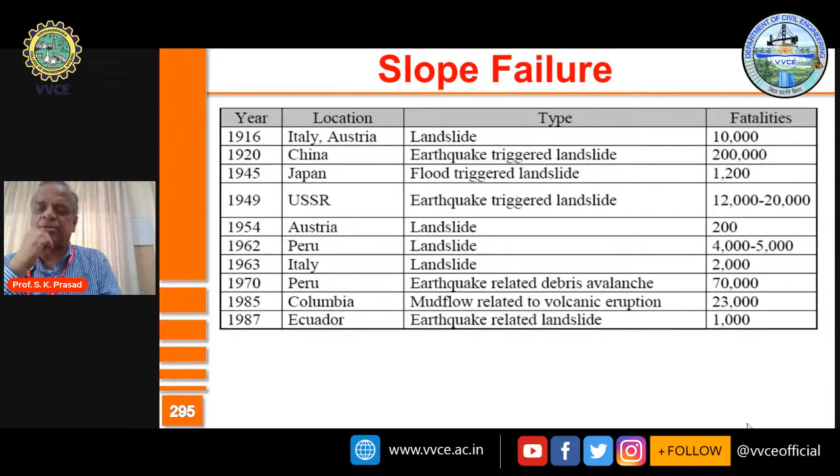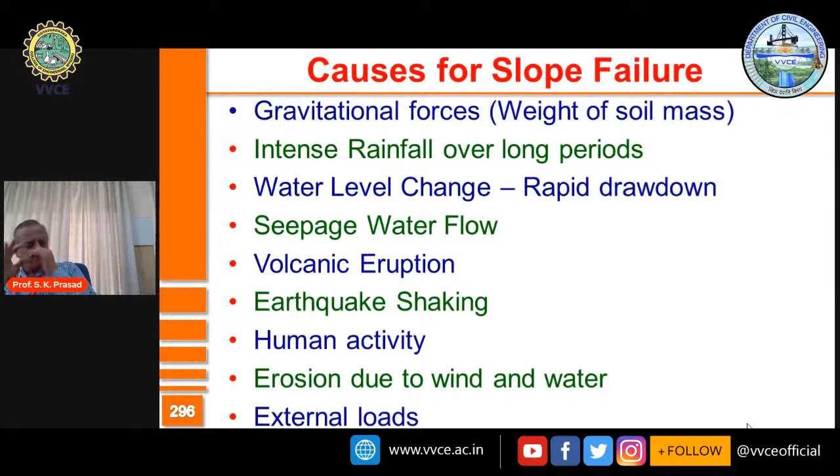Unfortunately, there have been many instances of slope failure in the past and present, killing not just hundreds and thousands but tens of thousands of people continuously. There are many causes for the failure of slopes: gravitational force, heavy rains, groundwater table suddenly experiencing rapid drawdown, seepage water, volcanic eruption, earthquake, human activity, erosion due to wind and water, and external load. But the major culprits, friends, are rainfall, earthquake, and human activity, which you have to consider. If you can control these, possibly many slope failures can be controlled.

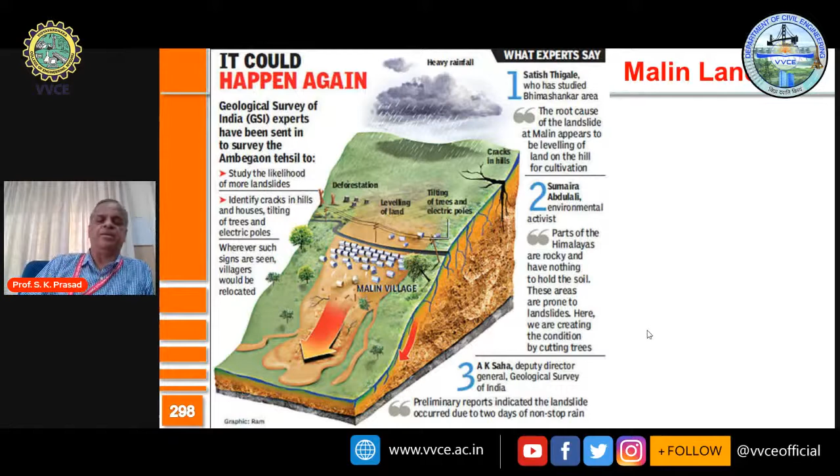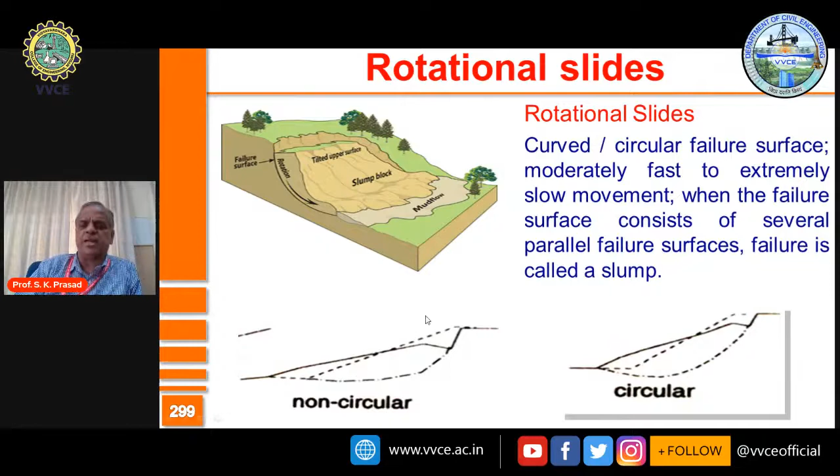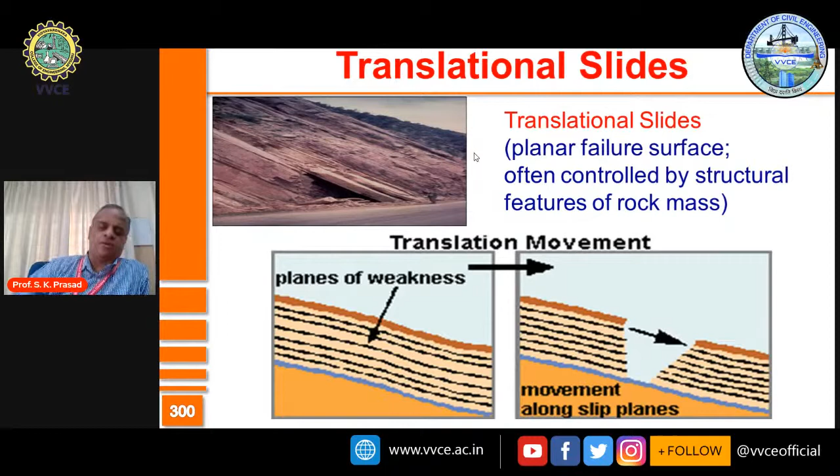So people tried to explain what were the reasons for a failure like this. A slope can fail because of a slide, and the slide can be in curved form, a rotational slide, or it can be translational, in planar form. It all depends upon the kind of soil that exists in the slope. It can be either rotational, in the form of a circle or curved shape, or translational.

Slope stability analysis basically includes determining the potential failure surface, the plane in which the failure surface happens, whether it is translational, in the form of a plane, or in the form of a curve. So you have to identify the potential failure surface, which is a challenge, and then the forces which cause the slip. You also have to identify the forces which resist it, which stabilize - that's the strength. And you have to decide on what should be the margin of safety, the factor of safety. So these are the four basic things determined in slope stability analysis.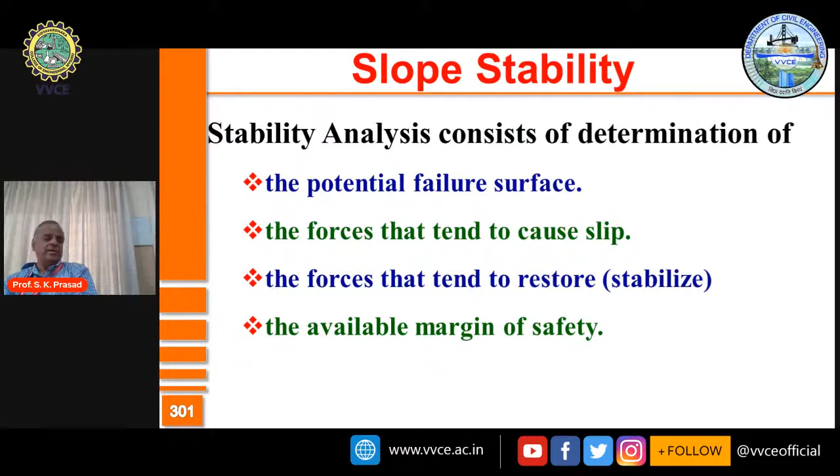But because the soil is heterogeneous, the slopes not being of uniform type, it's challenging to determine the available margin of safety. In general, factor of safety is the ratio of strength in the numerator and the stresses caused in the denominator, or restoring force in the numerator, disturbing force in the denominator.

So whenever the strength of the ground is high, automatically the factor of safety will be good. Whenever the stresses are high - stresses can be high because of human intervention, heavy rains, earthquake, or volcanic eruption - automatically factor of safety is going to reduce. You have to check whether the factor of safety is much higher than 1. Therefore, possibility of slope failure is less.

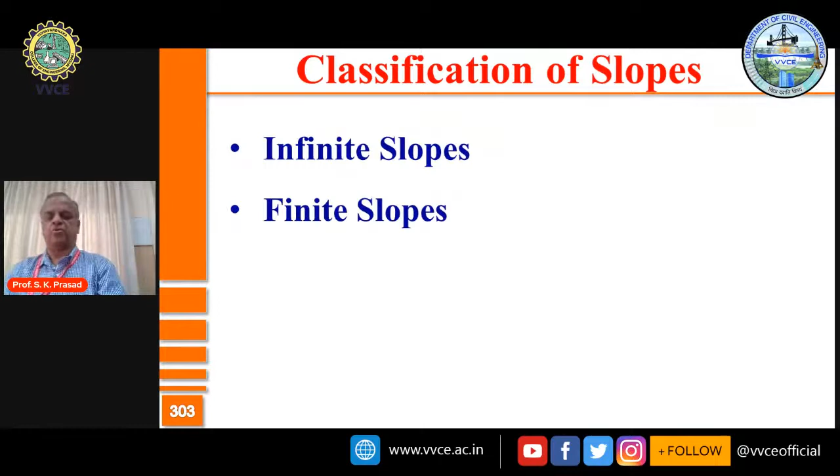Broadly, you can divide the slopes into infinite slope and finite slope. As the name indicates, infinite slope is one which extends to great length, both at the top as well as at bottom. So these are the slopes that have dimensions extending over great distances, and the soil mass is inclined to horizontal like this.

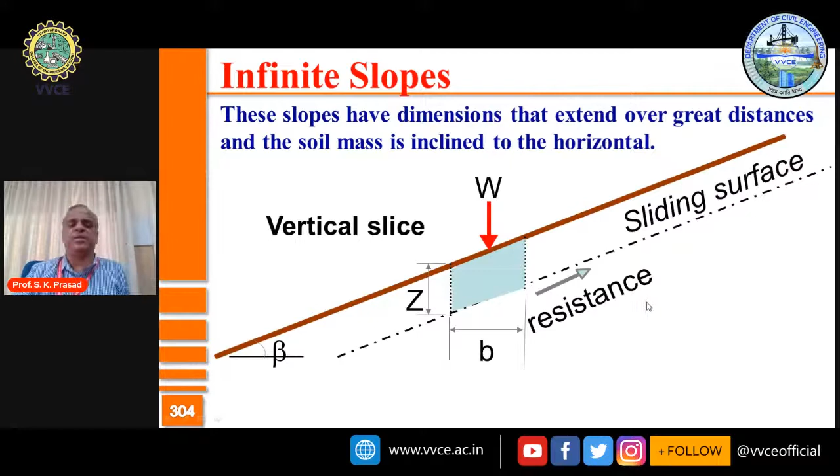So here, the first thing you have to consider is the plane at which the slide can happen. It may be at some thickness, some depth below the ground surface. You take a small wedge of soil, having a weight W, find out the shear stress which causes the slide, find out the resistance, and resistance to shear stress will give the factor of safety.

That's what you need to do. So you find out the factor of safety, which is equal to resistance or restraining force to the sliding force. And factor of safety is equal to tan phi by tan beta, where phi is the angle of internal friction - that's the strength - and beta is the slope angle. So in a homogeneous soil where you don't consider the effect of groundwater table, factor of safety is equal to tan phi by tan beta.

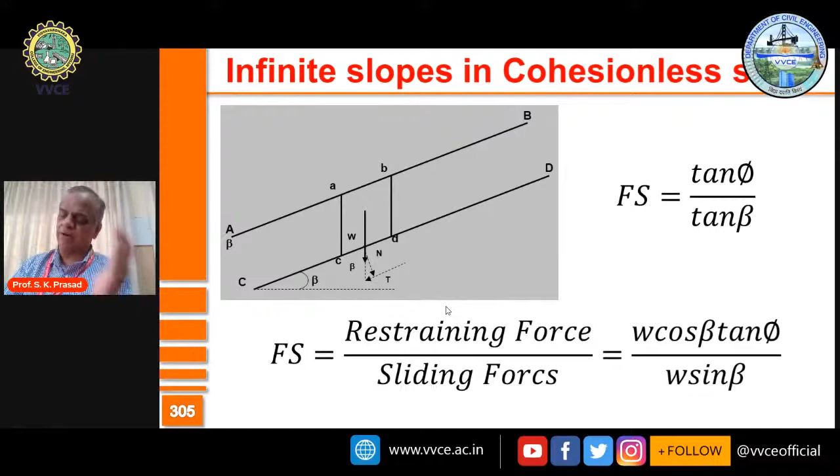So when the soil has good strength, such that phi is greater than beta, factor of safety will always be higher than 1. So possibility of slope failure is minimized.

The maximum inclination of infinite slope in a cohesionless soil for stability is equal to the angle of internal friction of soil. The limiting angle of inclination for the stability of infinite slope in cohesionless soil is as shown here. So whenever phi of the soil is more than the slope angle, you can take it for granted that the slope is stable. Whenever phi is less than the slope angle, it is going to be an unstable slope.

So Mohr-Coulomb criteria gives you the factor of safety equal to 1. So a slope which is at this line is just on the verge of failure, having a factor of safety equal to 1.

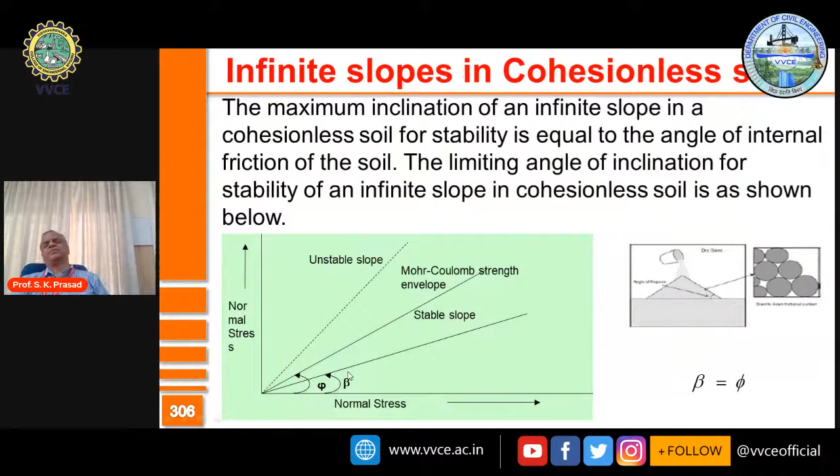You can also consider the effect of seepage. As I said, one of the major culprits for slope failure is rainwater. Because of the presence of rainwater, the soil will become weak, soil will lose its strength. In addition, water seeps through the slope and goes to the lower side. And whenever water seeps like this, it erodes the surface, causing the slope failure.

You can very easily show that whenever you consider the seepage effect on factor of safety - we already found in the previous slide that factor of safety is equal to tan phi by tan beta - in this case, factor of safety is equal to tan phi dash, where you use the effective stress, the effective friction angle, multiplied by gamma dash by gamma sat.

Gamma dash is the submerged density, gamma sat is the saturated density. So you use gamma sat to find the total stress, naturally considering the effect of water. On the other hand, for finding the strength, it is only the strength of the soil you have to consider, not water. Therefore, you need to consider gamma dash.

So friends, I want you to remember this equation: factor of safety is equal to gamma dash by gamma sat into tan phi dash by tan beta. You can solve a number of problems that were asked in previous question papers.

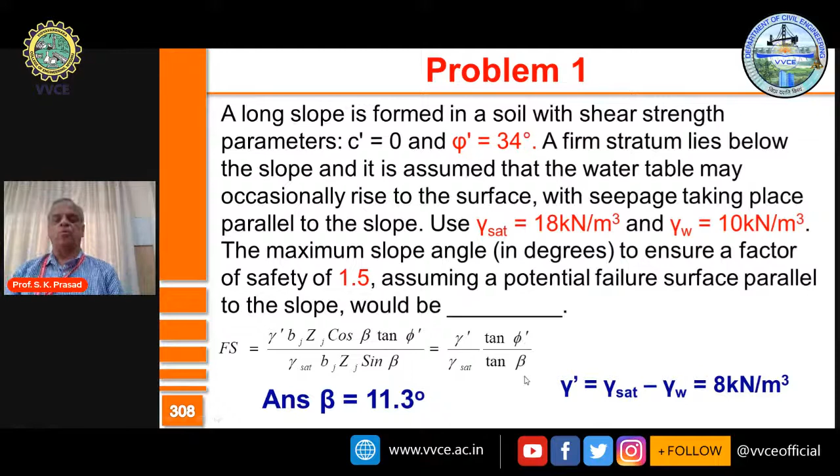Assuming the potential failure surface to be parallel to the surface slope, you know that factor of safety is given by gamma dash by gamma sat into tan phi dash by tan beta. Phi dash is 34, and beta is what you need to find out. Gamma dash is the submerged density, that is gamma sat minus gamma w. In this case, gamma sat is 18, gamma w is 10, therefore gamma dash is 8. With gamma sat 18 and phi dash 34, the only unknown beta is determined, which is equal to 11.3 degrees.

A very similar question: an infinite sand slope shown in the figure is on the verge of sliding failure, therefore factor of safety is 1. Groundwater table coincides with the ground surface, so the groundwater table is somewhere here. Unit weight of water is given, and saturated unit weight is given. Unit weight is 9.81 kilonewton per meter cube.

Saturated unit weight is 21 kilonewton per meter cube. The value of effective angle of internal friction in degrees, up to 2 decimal places, for the sand is given by the same equation. Gamma dash is equal to 21 minus 9.81, equal to 11.19. Gamma sat is directly 21. Phi dash is given, and then beta needs to be found. So you take factor of safety equal to 1, and everything is given. Therefore, beta here will be equal to 20 degrees.

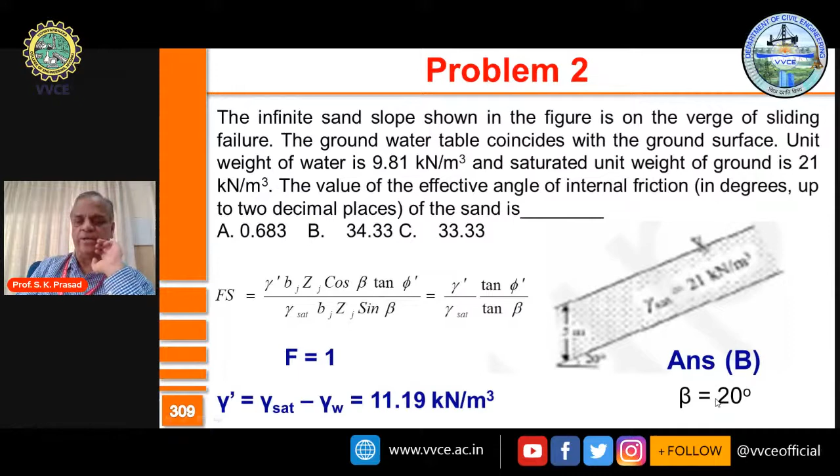Likewise, there is another problem very similar to that. Once you know the friction angle and the density, you can find it out.

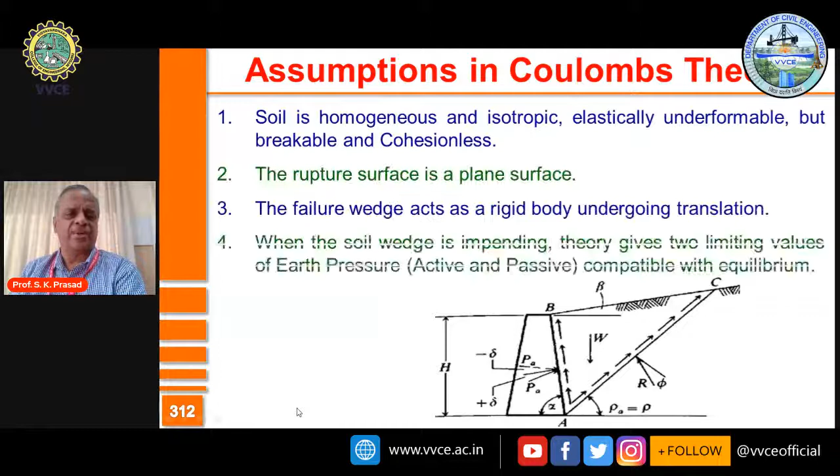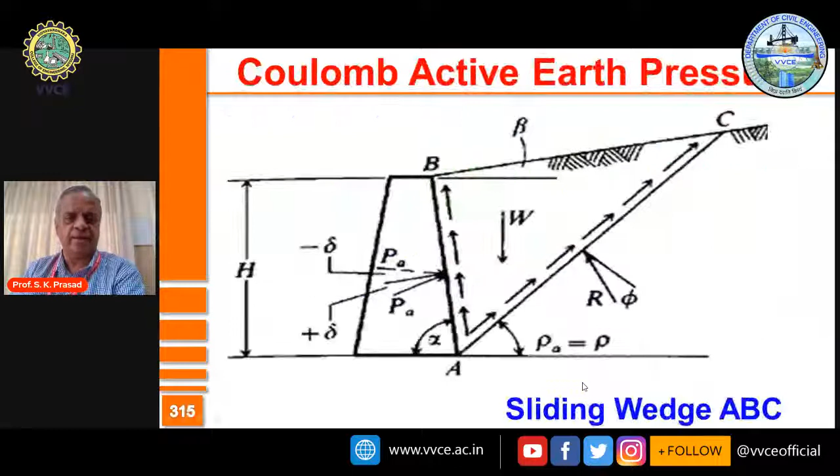With this I close my lecture, because I thought I would spend a little time on Coulomb's theory of earth pressure. It's basically a theoretical explanation with a lot of assumptions to be considered, and hence you have the wedge which is to be considered. Finally, you need to determine the forces acting on the sliding wedge: W is the weight, R is the soil reaction, and then you have the active earth thrust, PA, which is determined most of the time using the graphical method. There are certain advantages and limitations of Coulomb's theory over Rankine's theory, but most of the problems can be solved using Rankine's theory.

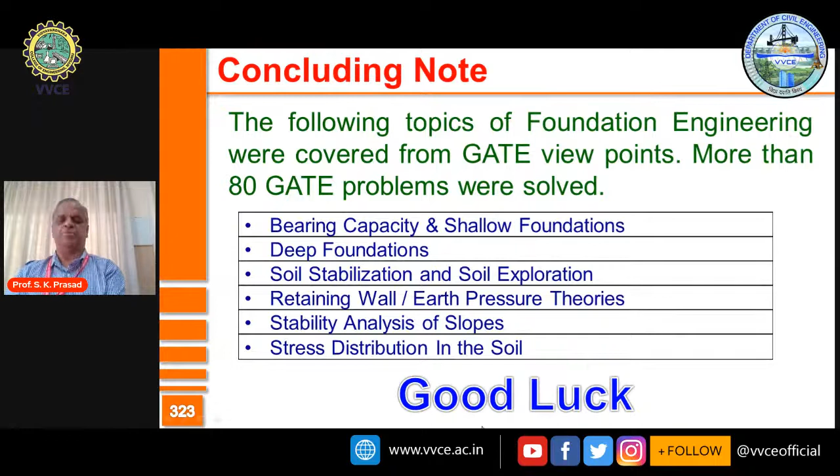Friends, with this I close my lecture, mentioning that there are lots of areas in which you can get GATE type questions, and you can refer to them. I conclude by mentioning that whatever I have dealt with is very important considering the history of GATE examination. So I did cover bearing capacity and shallow foundations, deep foundations, soil stabilization, retaining walls, stability analysis of slopes, and stress distribution. I wish all of you good luck.